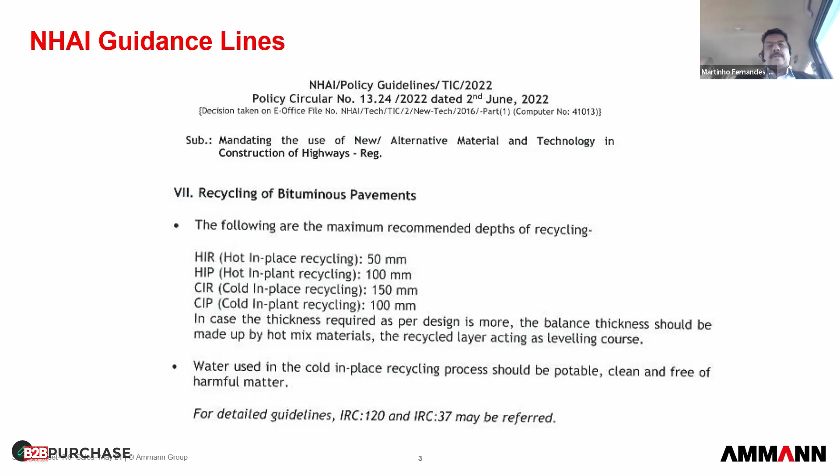Now if we just throw this into the ground, this bitumen will leach into the ground and then go down into the water, and the water will also get contaminated. So it's necessary that we use this.

When I visited this site and asked the owner and project manager what they were going to do with this recycled material, they said we have no idea what we want to do. Just because we were asked to remove it, we removed it, and we are putting a complete new layer. As far as recycling this, they said we don't have any attachment on the asphalt plant, and nor do we have a design to use it.

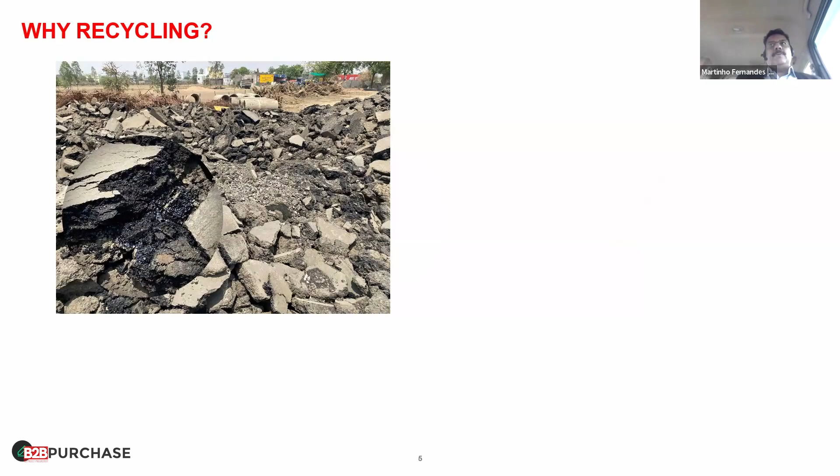So what we can do is use it in the wet mix, or in GSB, granular subbase, or wet mix macadam. But this doesn't solve our problem. Recycling means wherever you have taken material from the road, you have to put it back in the same place. If you have taken it from bituminous layer, it is better to put it in the bituminous pavement and not below it. If you put it below, it will work just as filler, it will not help anyone, and all the bitumen inside will be wasted.

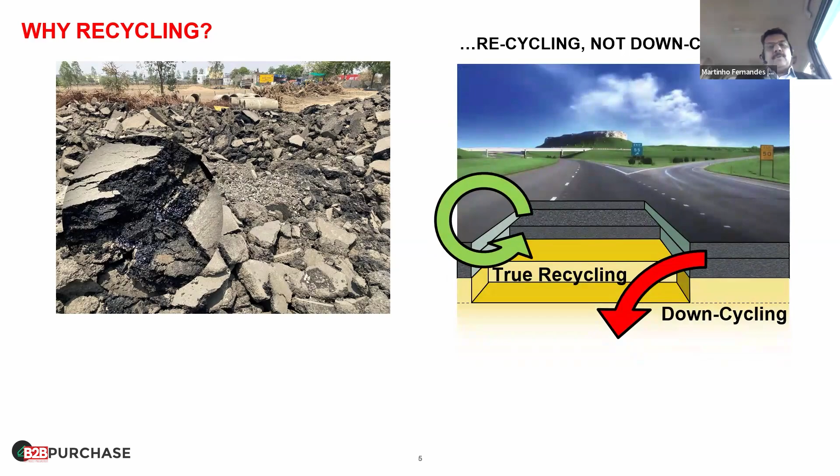We know recycling is very important. Why? It saves money, avoids landfills, and saves resources. This is given, this is understood now. We have been working on this recycling for around 4-5 years, and this is a topic we know: if you do recycling, we can save so many things. But today I'll take you a little deeper into the subject.

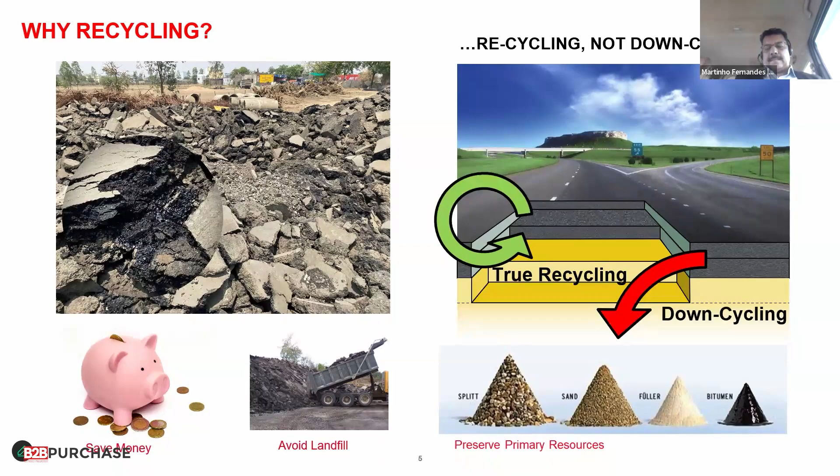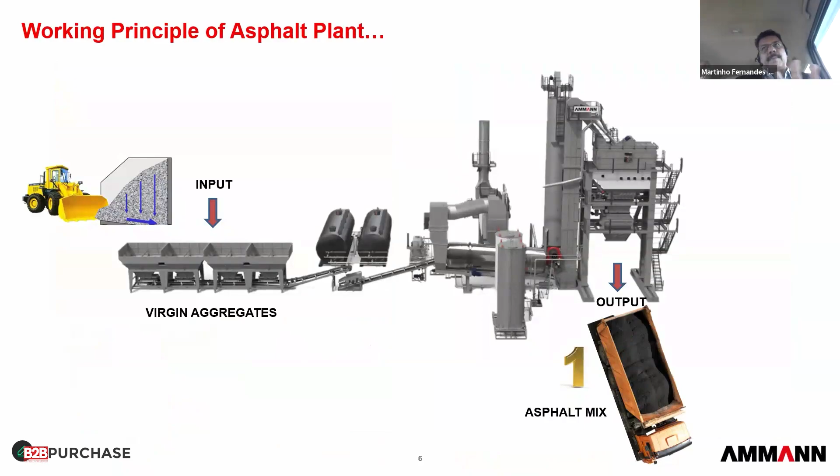Just keeping recycling aside, for those who work with asphalt plants: when you run an asphalt plant, you take the input, you process it, you mix it with bitumen, you mix it with filler or cement, whatever it is, and then you take the output, what you can see at number 1.

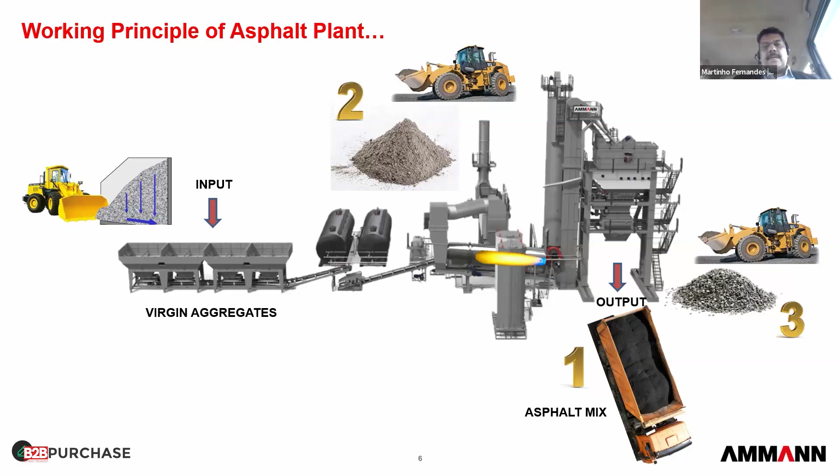Not only on the fuel saving, but the maintenance part, the processing part, time, power consumption, everything, labor, everything. So we are discussing today how to bring down this normal cost of asphalt plant through recycling.

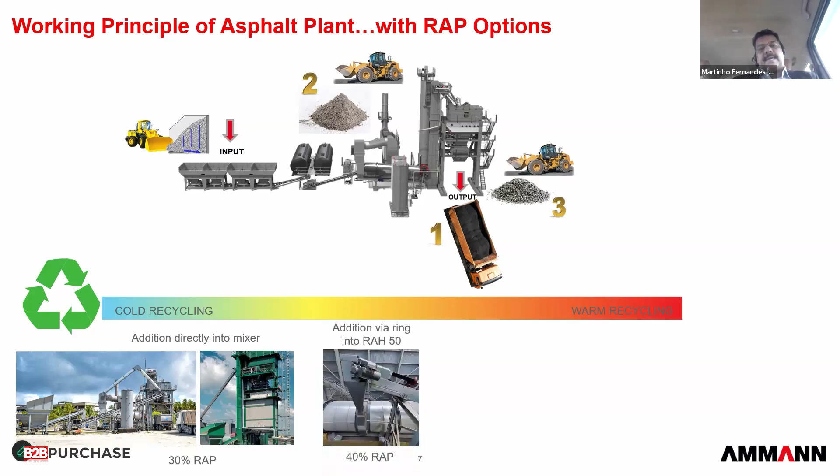On this slide, I'll take it a little further. I showed you the picture on top. Now imagine I take just 30% of recycling material. That means number 2 and number 3, 30% of the metal will be utilized into recycling because we are not going to process the fresh aggregate there, so that part will subtract. If I do 50% or 40% of recycling, the metal from number 2 and number 3 will also reduce because I am putting in recycled metal instead of processing fresh aggregate. Same with 60%, same with 100%.

So what I meant to say is recycling is not only helping renew the sources, but also helping with the normal running condition of the plant—we are saving money there too. So it is saving money on recycling material as well as on running the asphalt plant in normal condition.

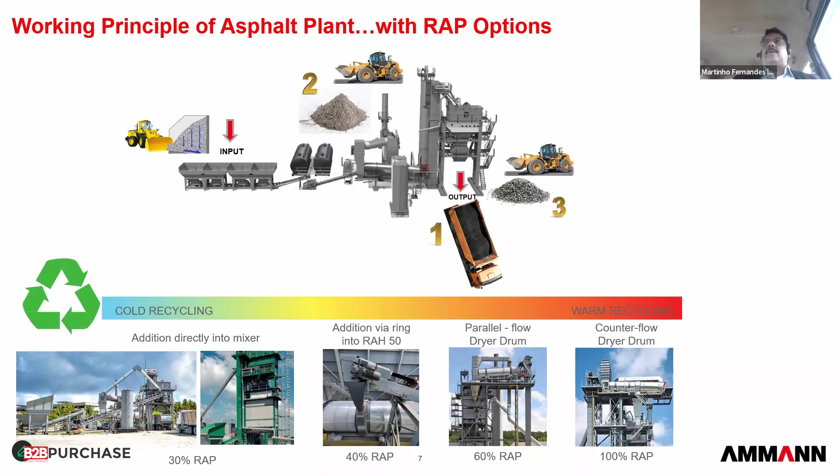So let me go a little further into the subject. Before recycling, it is very important that RAP management is known, because once you bring your RAP, you have to do the sieve analysis, do the gradation, see how much bitumen is inside, and then match it with your fresh mix design using the sieve analysis.

What we have seen is whenever we have these big chunks, in India we usually use a crusher to break them. Technically, it should not be a crusher—it should be a lump breaker, or what we call a shredder in Ammann.

What it does is, if you see any chocolate with nuts inside, like nut chocolate or Cadbury—if you break the chocolate, the gum part breaks, but the nut never breaks with your hand when you try. If you take a hammer and start hitting that chocolate, then the nuts break along with the other part. Same way, we have the same example here.

If we take these big chunks of RAP material removed from the pavement and put them in a crusher, the crusher will break everything—not only the gum, but everything, even the stones. Once you break the stones, they become finer, creating a larger surface area, which may not have a very good impact.

Secondly, when you break the stones, they open up from the center, so the white part becomes visible. When the white part is visible, you require more bitumen to cover it. So in this way too, you're not going to save much. The best approach is to use a lump breaker or shredder.

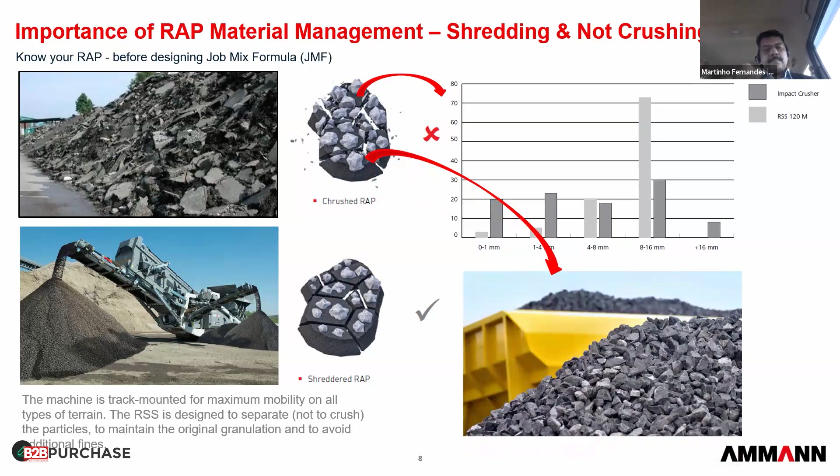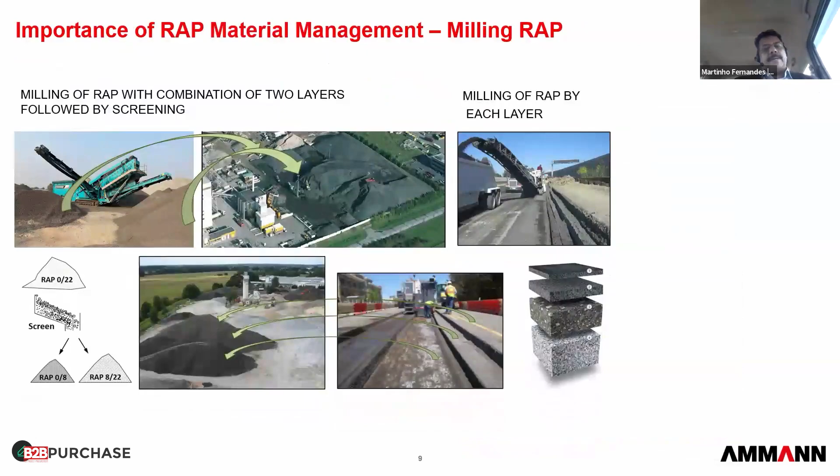But in India, what I've seen is mostly we use a milling machine. Once you mill it and bring it, we use a power screen or any screen to separate it. It's very important to separate the RAP material into coarser and finer fractions. Once we have more fractions of RAP, it's easier to control them. Otherwise, if you don't treat the RAP with proper gradation, no matter how good your plant quality is, it's of no use.

The road will break. So once we have this gradation—we usually do this in Europe, at our factory and other Ammann sites—we cover the RAP material, because while milling we put water in, so there's already water in the recycled material. Also at night there's dew, and in the rain season there's rain, so all this gets absorbed by the recycled material. So the best thing is to cover it. The covering has to be done—the drier the material, the higher the capacity of RAP that can be used.

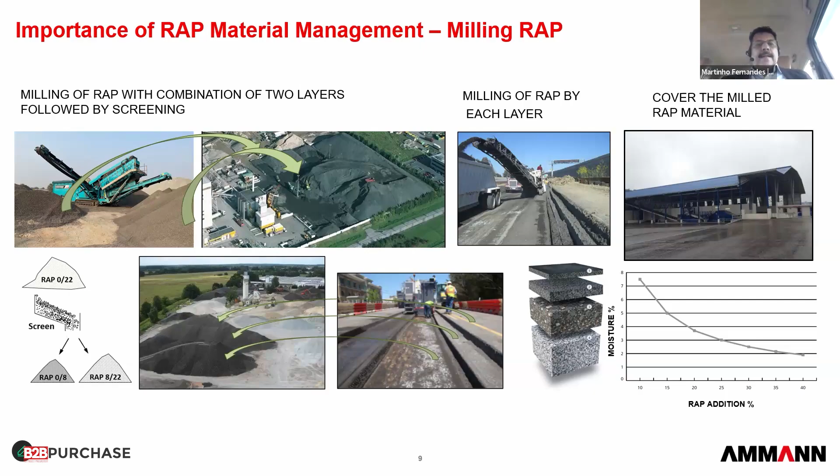Now coming back to the plant, what percentages can we use? We use 20 to 30%. There's a method for that, and this method is mostly used in India. Right now, we have supplied 273 plants with this method.

In this method, what we do is fill this material into the RAP hopper for 30%. We do the volume calibration of this hopper, take the material all the way on the elevator, and then we have a weighing belt—same as what we have in a concrete plant—for the 30% of the metal. For example, if we take a batch of 1 ton, 700 kgs will come from the normal plant as virgin aggregates, and 30%, or 300 kgs, will come from this recycled material. We weigh that 300 kgs exactly and then mix it inside the mixer with the virgin aggregate.

The temperature of the virgin aggregate coming in will be higher, because we need heat transfer since the recycled material is going in cold. We know exactly what temperature is required in the final mix—say 150 degrees—we just feed it into the computer. The computer does the reverse calculation to get the virgin temperature higher, maybe 160, 180, 190, or even 200 if the moisture is more, and then we get the correct mix with the recycled material.

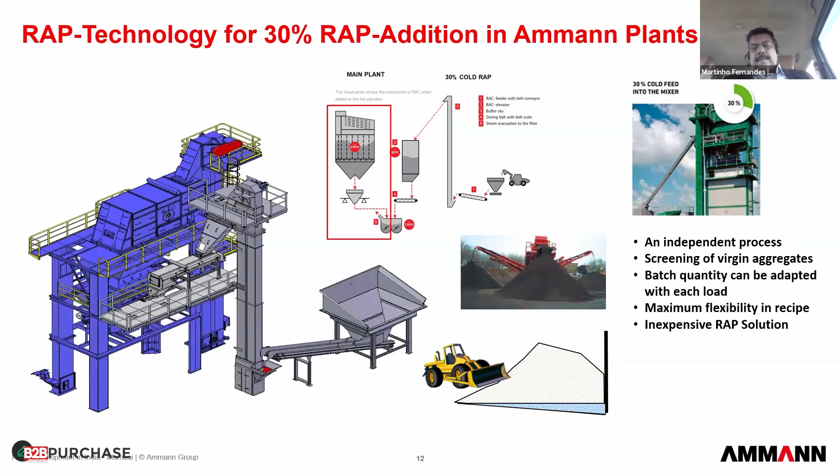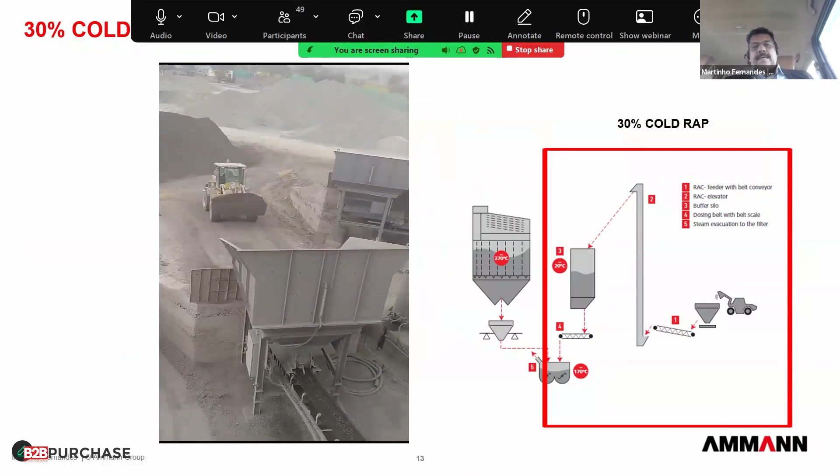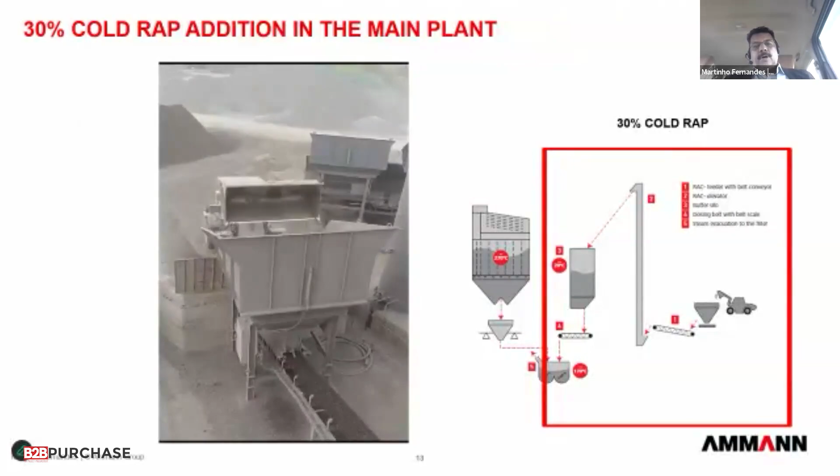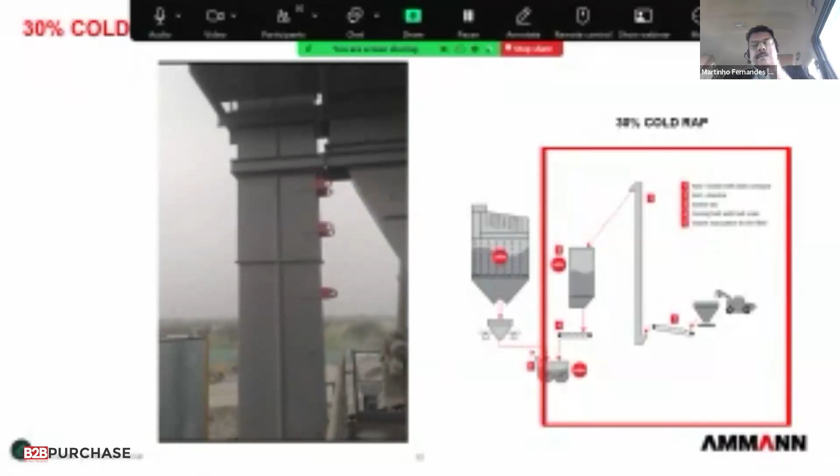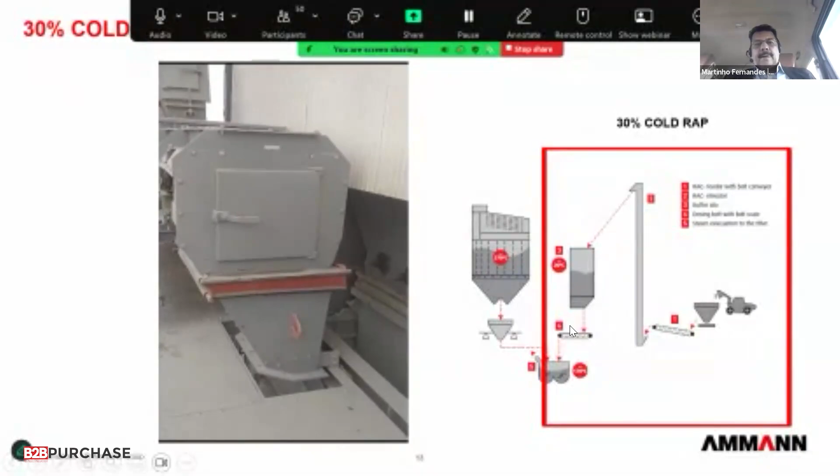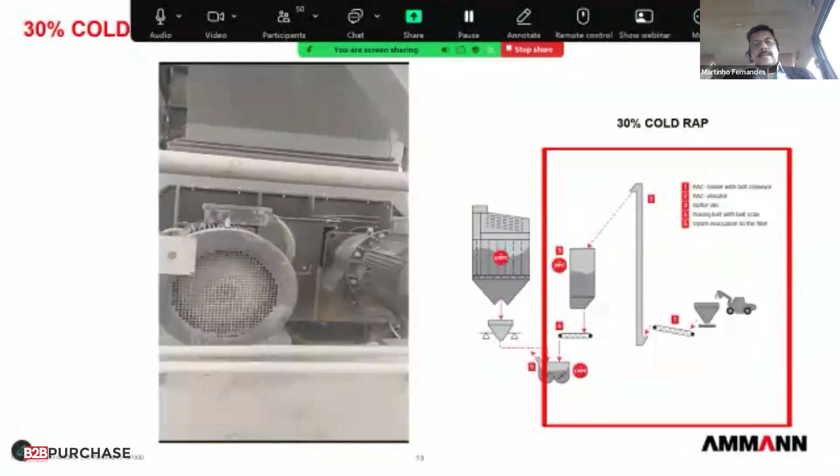The video shows only the recycle addition; the rest of the plant works on the other side with fresh virgin aggregates. The material comes in, and this is the weighing belt—you can see it weighing 300 kg here, and then it's processed inside the mixer. This is the mixer, with virgin aggregate at 70% and 30% recycled material, which we mix and run again.

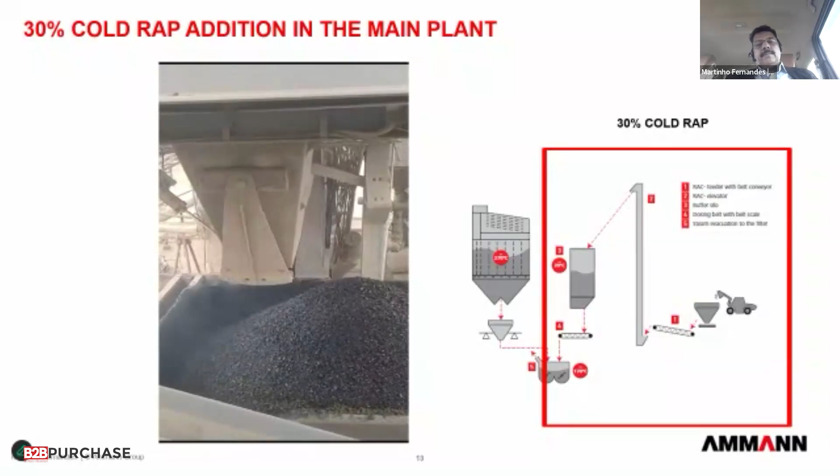This method with 30% recycled content is used in most parts of India because it's very controlled. We get a printout of everything—temperature, each batch, and the percentage used from morning to evening, whether it's 30%, 25%, or 20%. Whatever percentage we use, it all comes on the printout.

By sitting at one location, I can see what is happening in this plant and get connected to any other plant all over India, including our factory in Gujarat.

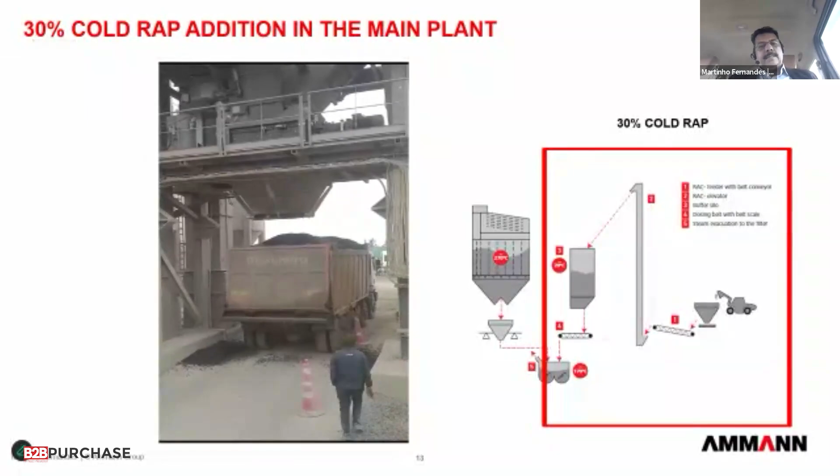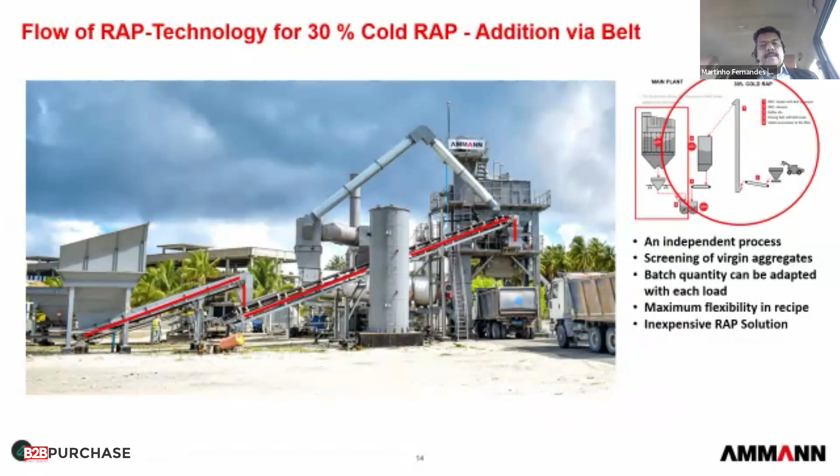In some places where there's no room for an elevator, we use a belt system, a long conveyor system, but the process is the same for 30%. Once you cross 30%, you have to use a regenerator to regenerate the dead, oxidized bitumen. Once you cross 20 or 30% and want to do RAP, you need to use this liquid.

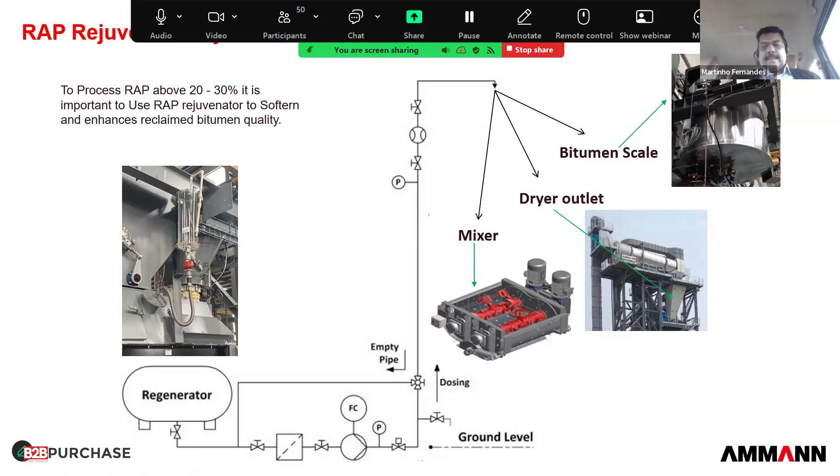This liquid can be fed inside the mixer, or put inside the dryer outlet for bigger plants using 60%, or put in the bitumen weigher—not the bitumen tank, the bitumen weigher. We can add it as per the required percentage; usually they use 0.2%. This can be used in these plants, and we usually apply it once we cross 20 or 25%.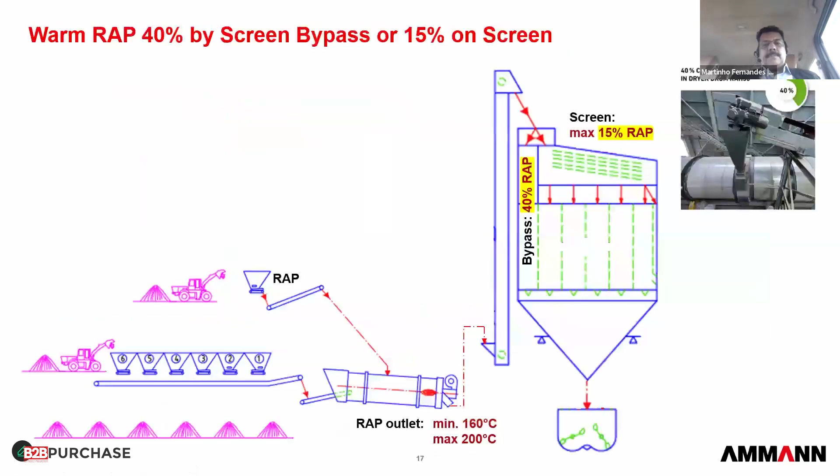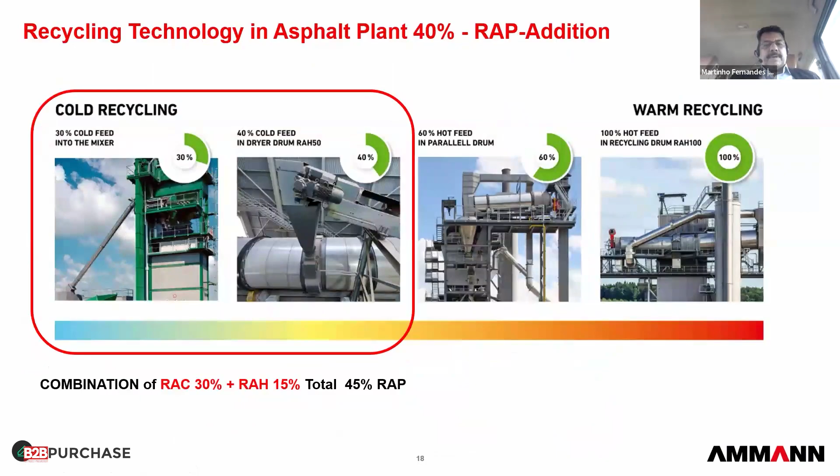Going further, there's the 40% method, where we use a hot warm RAP put inside the drum, combined with the 30% cold method. That combination comes to 45%—30% cold and 15% hot. We have many such combination plants, using both cold and a bit of hot, so you can go up to 55% or 45%.

The reason is that the largest aggregate, like DBM aggregate, can be put inside the drum and heated because it has less bitumen on it. The finer material with bitumen we use directly inside the mixer, because BC especially has a lot of bitumen—2%, 3%, sometimes even 3.5%. So this is a combination of both methods, and we have about 11 such plants all over India.

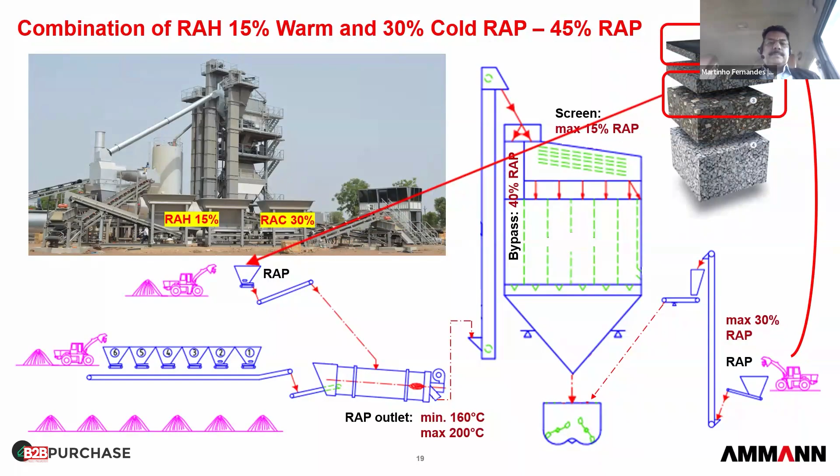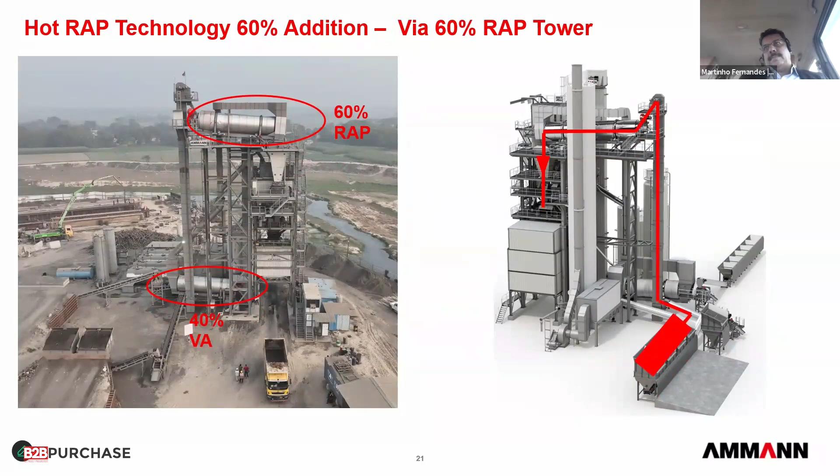In this design, we have 2 drums, one at the bottom and one on top. This technology is far more advanced because 60% will be hot recycling—here virgin aggregate is only 40%, and the rest 60% is hot recycled material we process. And these are the plants.

I'll show a small video to wind up my presentation—this is for the 60% plant, a very small video. It's available on YouTube in a bigger version where we explain everything, but just to sum up in this short presentation, I put this working site showing the recycling.

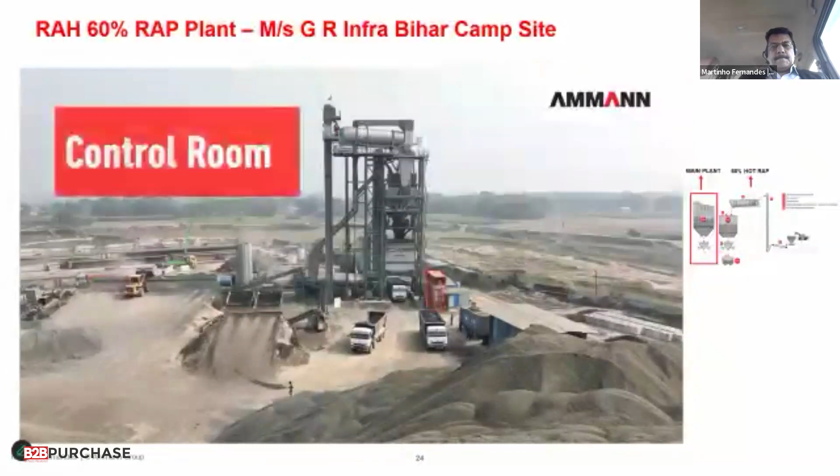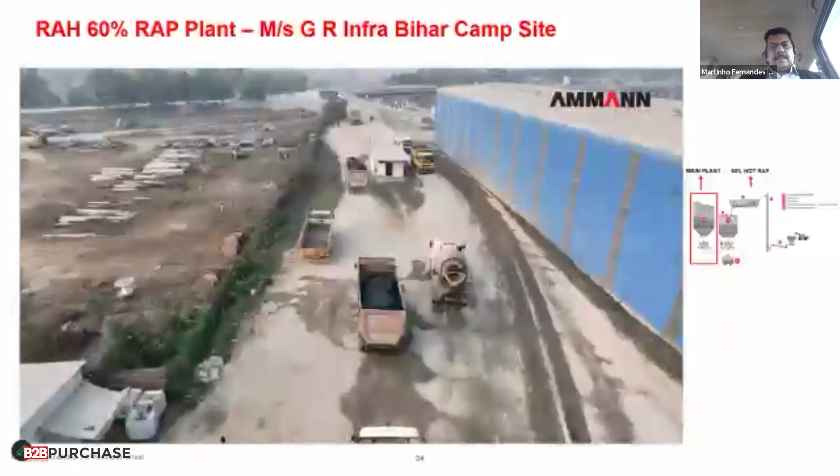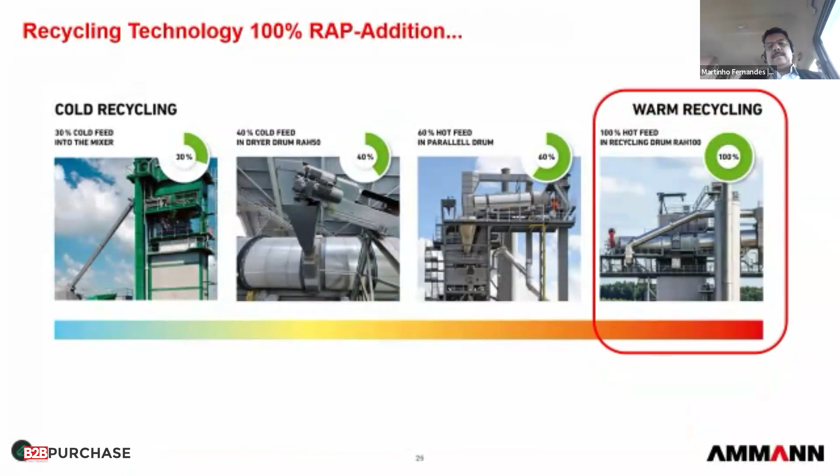And then there's 100% recycling, but we have not done that so far in India. In Europe, however, there are around 73 plants like this. I won't go into that now, but once we do it, I will definitely present it to you all.